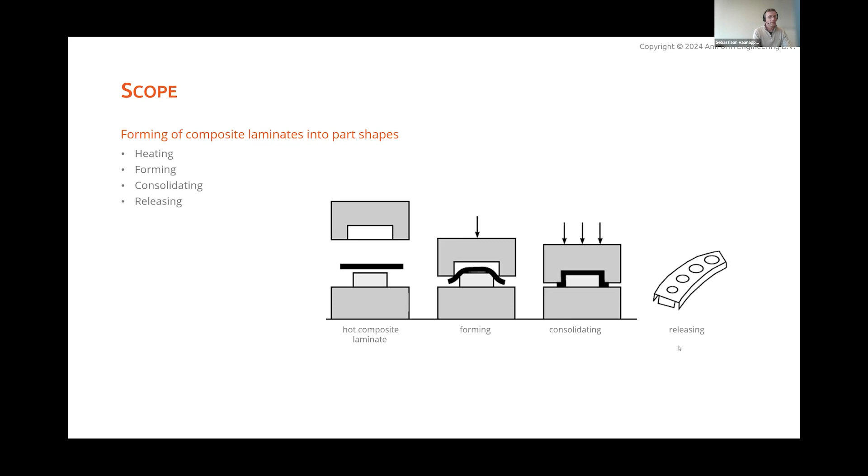Usually we consider a laminate, which is heated, then we form it, we consolidate it, and then we release the part and we have a nice part. Well, not always that nice. During the forming, there can be some defect development, like wrinkles, some poor consolidation spots, ply splitting, all kind of defects that can knock down your structural performance of the part in the end.

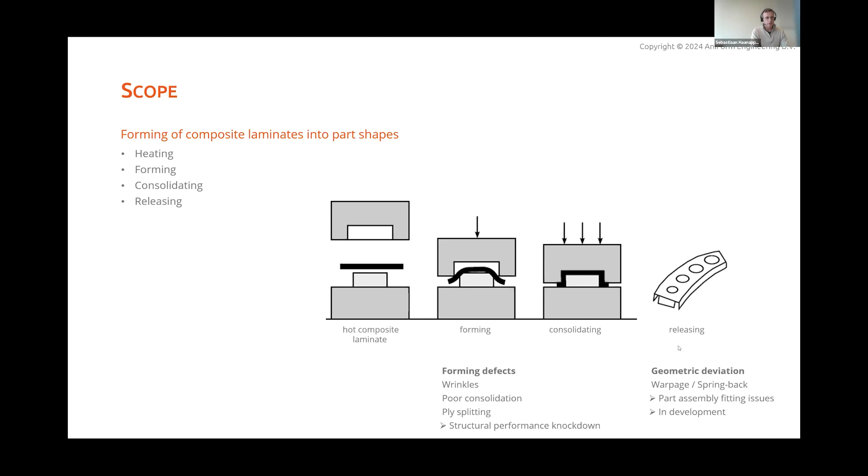Also, in the release stage, there's usually some geometric deviation occurring, also known as warpage or spring back, which gives some problems when doing part assembly in larger structures. It gives us fitting issues. We work on that kind of simulations as well. It's in development. That's not part of the talk today. Today's focus is on forming defects. And yes, it may be clear that there are quite some manufacturing challenges.

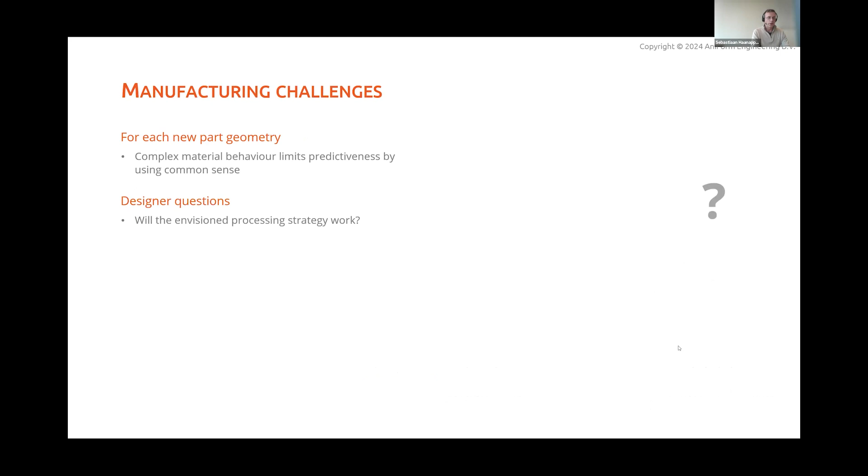So what about these? Well, what we see is really for each new part geometry, the complex material behavior of these composites in their molten stage really limits predictiveness by using common sense. And we see a lot of designer questions like, I have a process strategy in mind, but will it actually work? Will I have wrinkling or fiber waviness, and where does it occur? What about this poor consolidation? Caused a lot by fiber bridging, when fibers span corners, for example. What about my temperature? What about cold spots and crystallization?

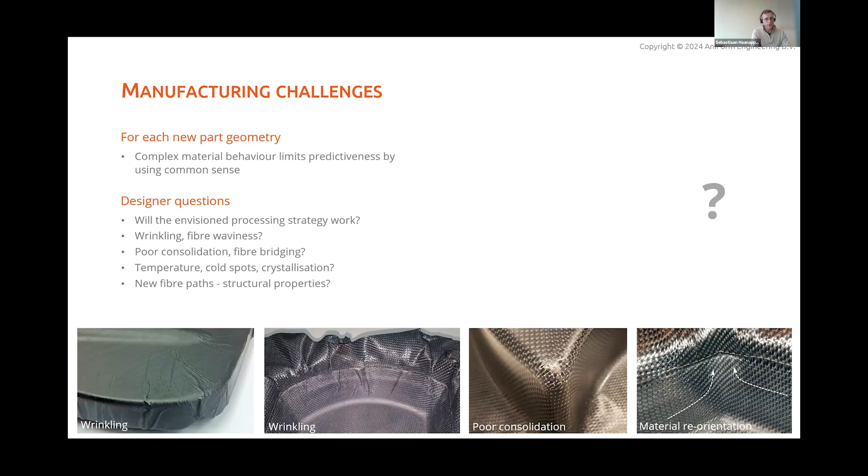When I form a part, I get new fiber directions. We get material reorientation. What will it do with the structural properties? A lot of questions. And in the traditional approach, we usually go through many design iterations to answer these questions. So usually we have a part design. You think of a process design to make it. You take the part in production, and usually we have some issues. So you can go back to the drawing table and rethink the part design and the process design. And usually you go through this cycle quite a lot of times, and we call that trial and error.

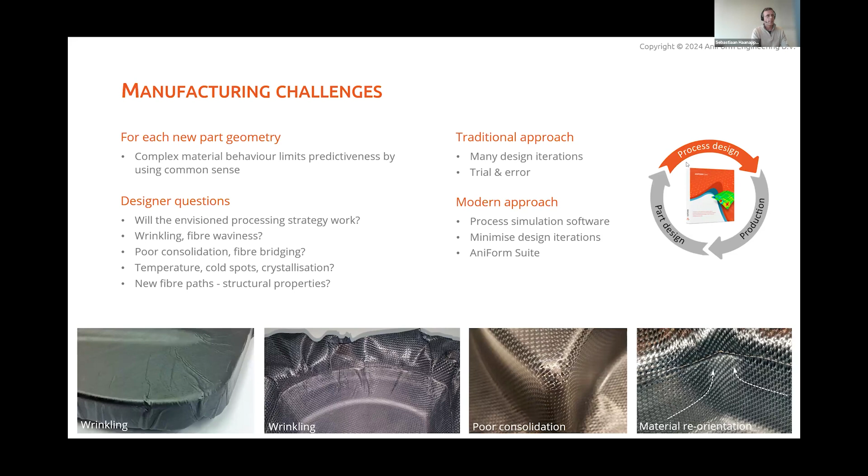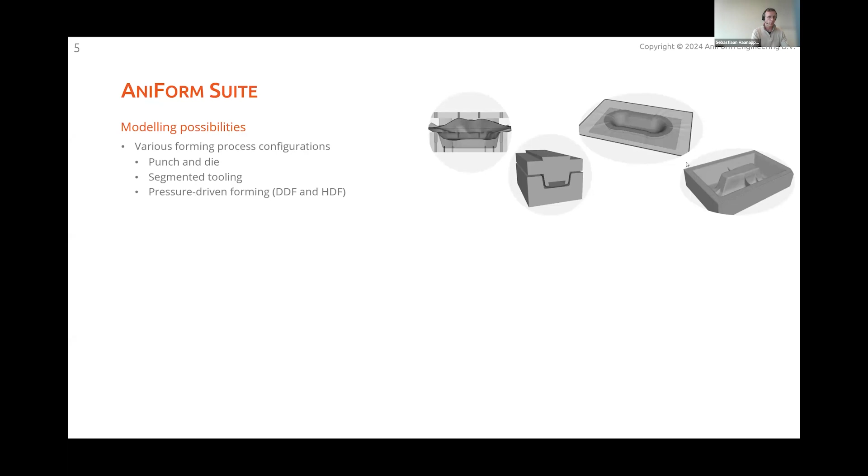And the slightly modern approach would be to use a process simulation software to minimize this number of design iterations. And that's why we thought, let's support that and let's develop a software, which we nowadays call AniForm Suite. So that's a software package, and it has all kind of modeling possibilities. I quickly go through it. You can model various forming process configurations, just the classical one, a punch and a die, and form it. But you can split up the tool as well and go for segmented tooling and see what happens with the forming of your laminate. There are also other variants like pressure-driven forming processes where we talk about double diaphragm forming or hot drape forming.

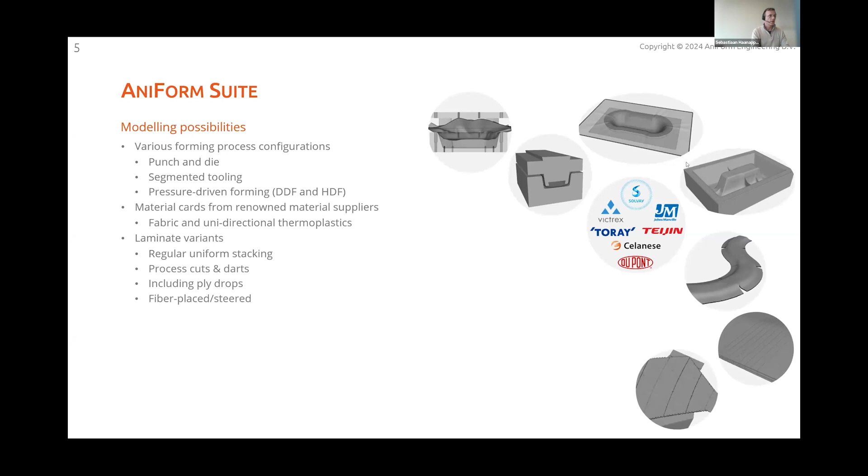You can model a material by using a material card. We have them from renowned material suppliers like Solvay, Victrex, Toray, Teijin, Johns Manville, Celanese, and DuPont, representing a fabric or a unidirectional thermoplastic composite. You can play with laminate variants. So a regular laminate consists of a uniform stacking of plies, where you can process in the blank, for example, cuts and darts. But you can also include ply drops and model tailor blanks in this way. You can also model fiber steered or fiber placed blanks.

And then you can play around with how you handle the laminate, because there are quite some methods and you can study them in the software. So you can, for example, use grippers and springs and connect them to the laminate and see what happens. You can also use another kind of support like pin supports.

Well, that's all nice. And you can create your model and then do a simulation, and a simulation is then solved by our autonomous implicit solver, a finite element solver. And that gives us quite accurate results today. And that is amongst others possible because we model the relevant deformation mechanisms that develop during forming a laminate.

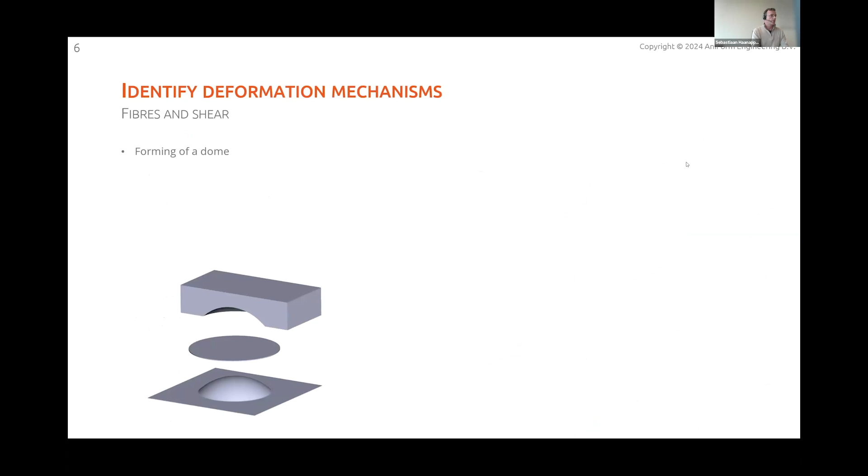What about these deformation mechanisms? Let me explain a bit what we take into account here. So let's identify these deformation mechanisms. And I would like to use this example for that, the forming of a dome, a circular blank, a punch, and a die on top. And we form a cross-plied unidirectional laminate like this. And if you form it, it typically looks like this.

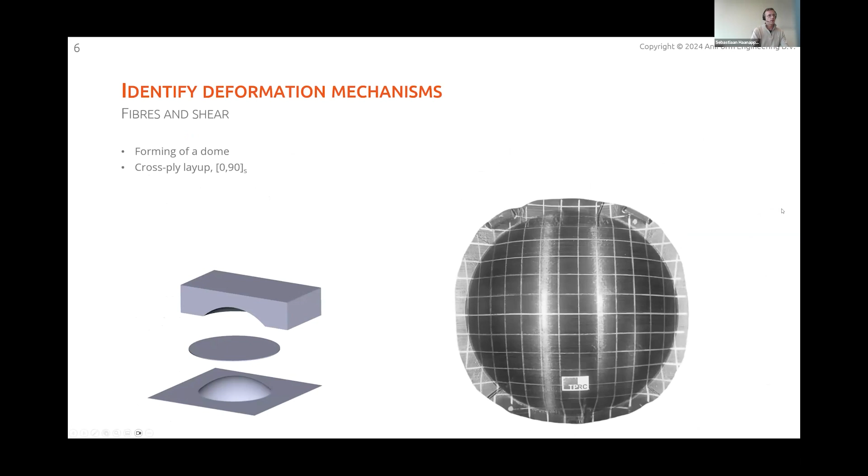And if we take a closer look, you can draw lines here in the 0 and 90 direction, and we see that the material gets pulled inwards. That is because there's no stretch in the fiber direction in those directions. We also see at those locations no in-plane deformations in those indicated spots.

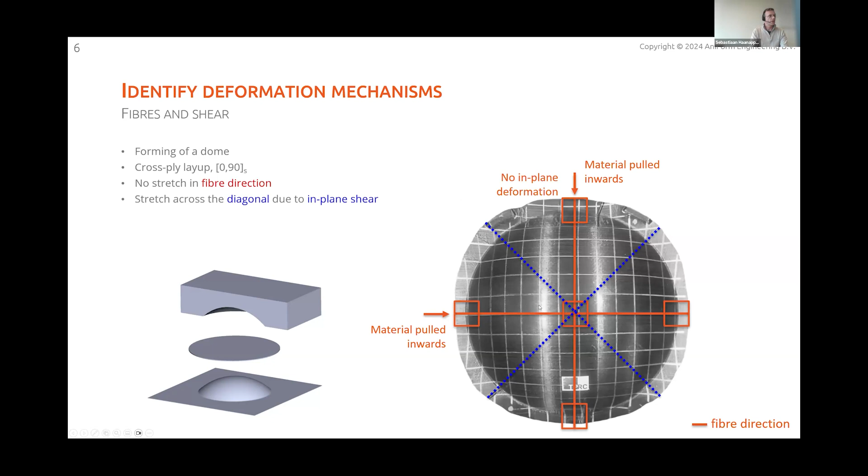On the other hand, if we draw diagonal lines here, we see some extension or stretch, and that is due to some in-plane shear that is developing here. You can clearly see in the corners that these squares are actually not square anymore.

So what we see here is that there's some fiber inextensibility, which we need to describe, and there's in-plane shear going on, governing this forming process of this dome. So these mechanisms for sure need to be considered in the model.

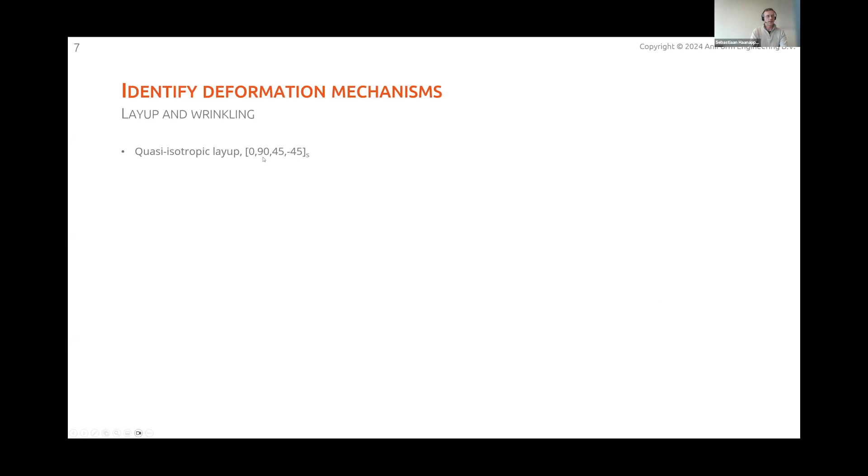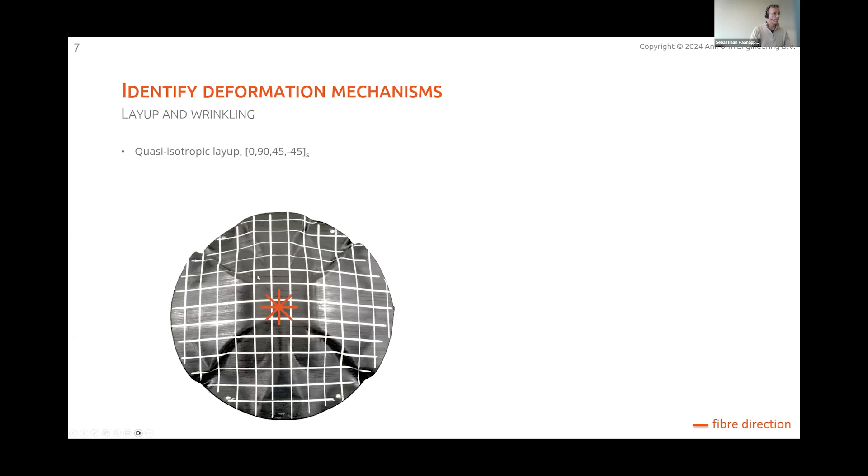Going a step further, this was a cross-ply laminate. Now let's focus on the forming of a quasi-isotropic laminate. That means there's 0, 90, 45, and minus 45 fiber directions in there. And if we form that dome, we get a different result. We see quite some buckling going on. These are, by the way, the fiber directions in that laminate. We see quite some local bending and buckling going on.

And if we completely close the press, these buckled areas are pressed into large wrinkles. So there's quite some out-of-plane mechanisms going on, and that means we need to really describe this out-of-plane bending behavior. We need to describe the out-of-plane bending rigidity in the model.

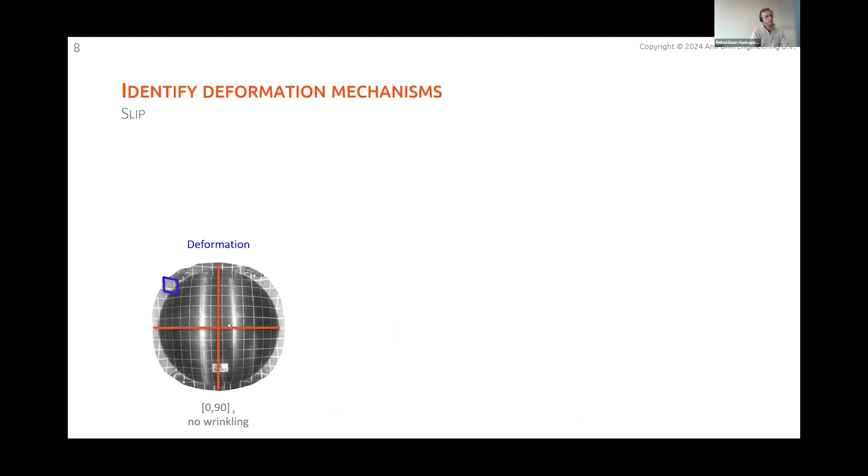The last deformation mechanism is about slip. So you may remember the first result with the cross-ply layup we had. It looked like this, a nice dome without so much wrinkling. And we saw a lot of deformation at specific spots, shear deformation.

Suppose we have the same cross-ply laminate, but we rotate it by 45 degrees, then we get a rotated deformation field, where at this point we now have no deformation, whereas we had deformation in the original rotation. So for a quasi-isotropic layup, actually both situations are present, but then superimposed. And that gave us this result, a lot of big wrinkles.

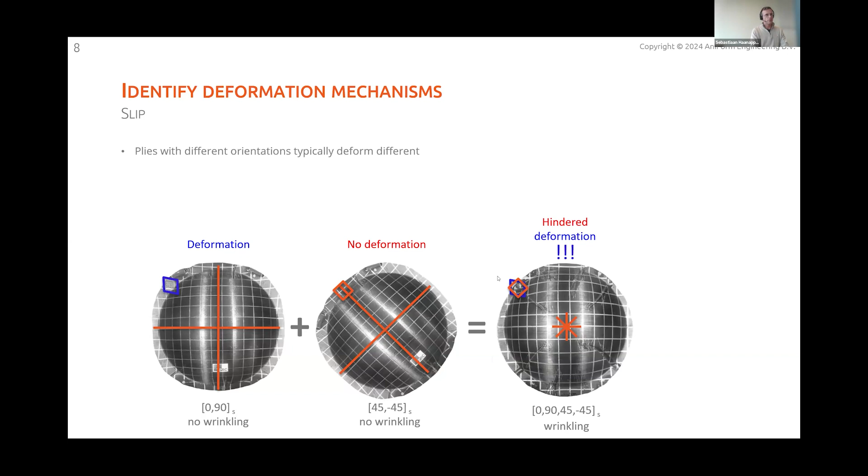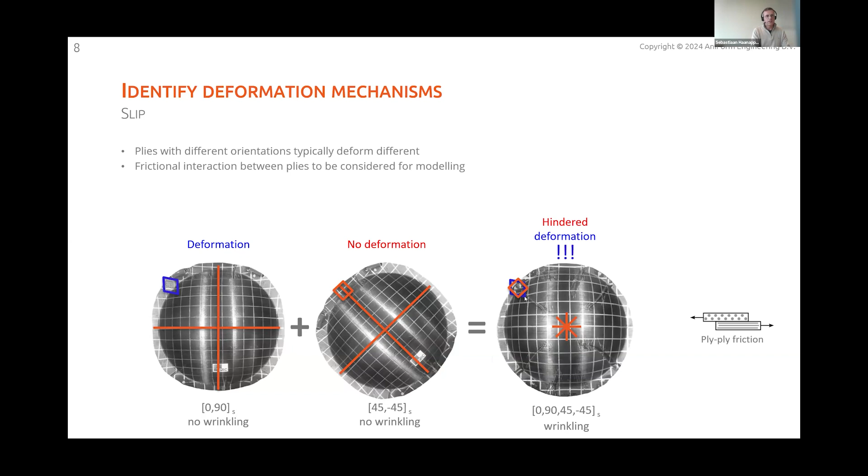So what can we say about this? Well, plies with different orientations typically deform differently. They have, in this case, a rotated deformation pattern. But it means at certain spots the deformation is hindered due to frictional interaction between the plies that is occurring there. And therefore, we can say that we need to model the friction between the plies.

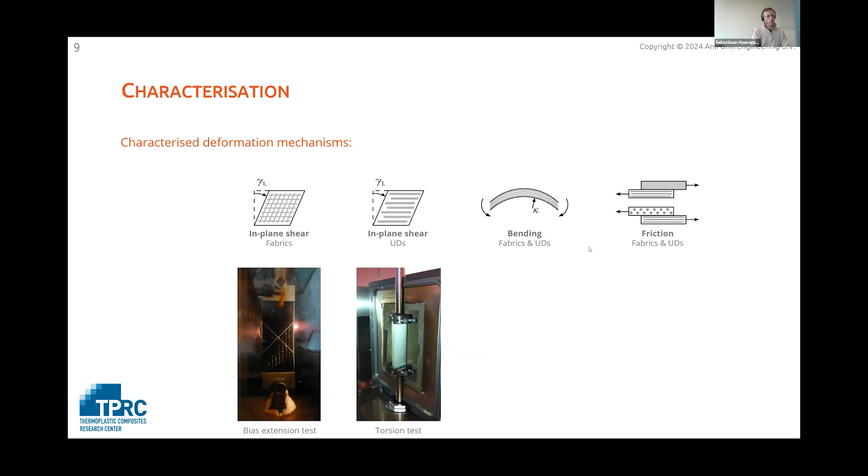Okay. So the characterized deformation mechanisms are in-plane shear for fabrics and unidirectionals. We characterize bending for fabrics and UDs, and we characterize friction for fabrics and UDs. And we use the bias extension test for characterizing shear of fabrics. We use the torsion bar test for characterizing shear of unidirectionals.

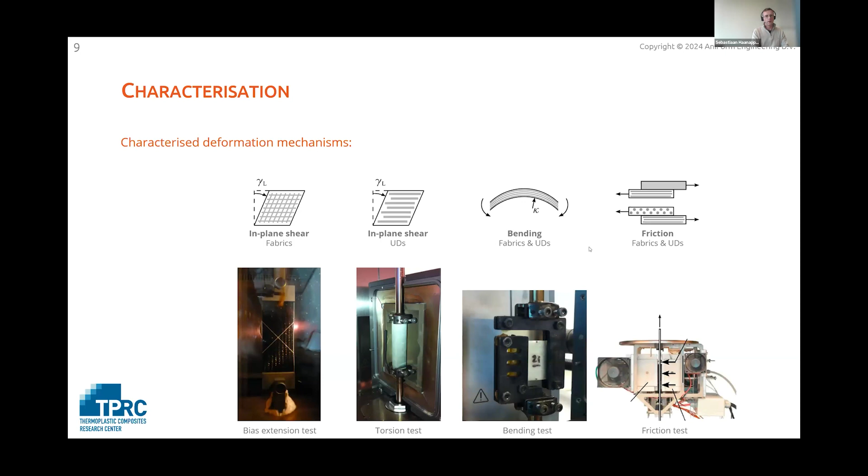We characterize the bending behavior using a bending test in a rheometer, and we characterize the slip using a friction tester. And that is a program today offered by the TPRC. So we have that characterization generally available in those results.

Let's go back to the simulation. We want to create a model, and the domain we simulate is represented by finite elements like displayed here, all these triangles. Then in this model we describe the observed and characterized mechanisms. And these are described by calibrated constitutive models serving as an input for these finite elements.

And we use different finite element types for the different deformation mechanisms. So we use membrane elements to describe fiber tension and in-plane shear. We use discrete Kirchhoff triangles to describe the out-of-plane bending of plies, and we use contact elements to describe ply-ply friction, but also tool-ply friction naturally.

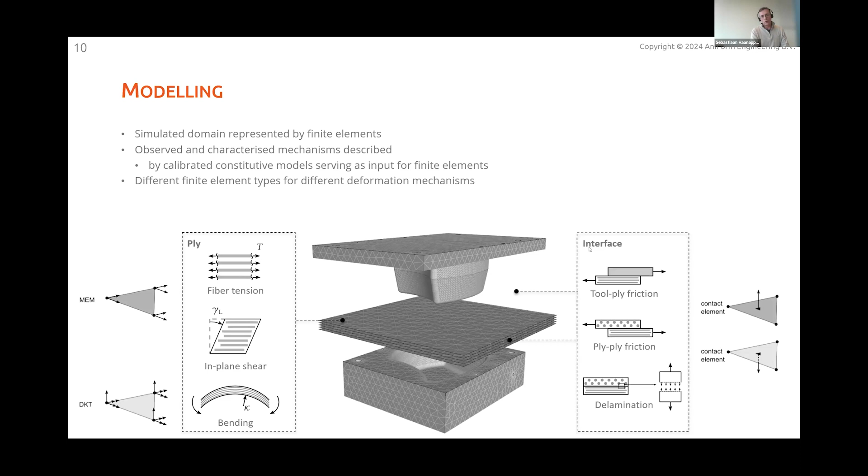And yeah, let's see what we can do with such a model. And therefore, I have a little case study. It's a demo part. It is relatively deep. It has concave and convex flanges. We manufacture it using a woven fabric 5 harness carbon fiber PPS matrix material. It's also known as the Toray Cetex TC1100.

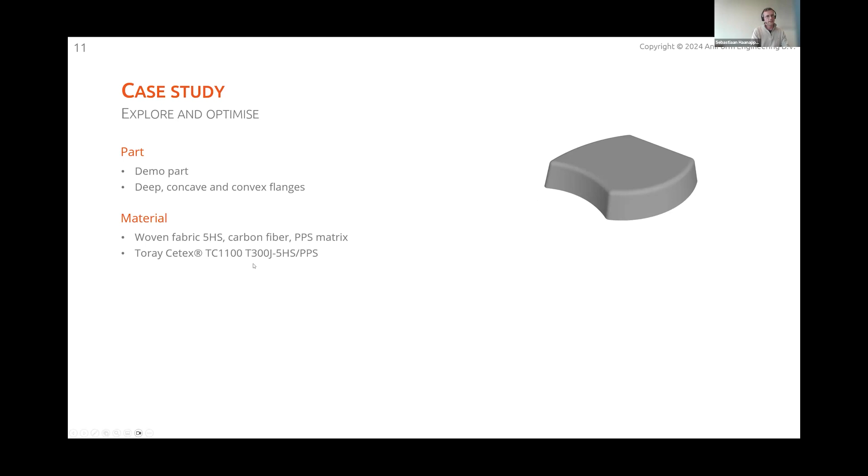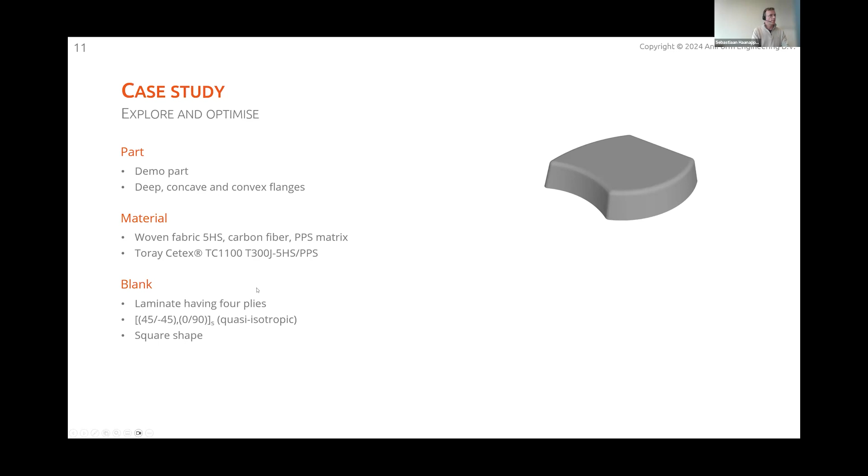We consider a blank. It's a laminate having 4 plies, initially stacked in a quasi-isotropic manner, so 45s on the outside, and in the center we have a 0/90 ply or 2 0/90 plies, and we consider a square shape of the blank. And you can model that then in AniForm pre-post and do a prediction.

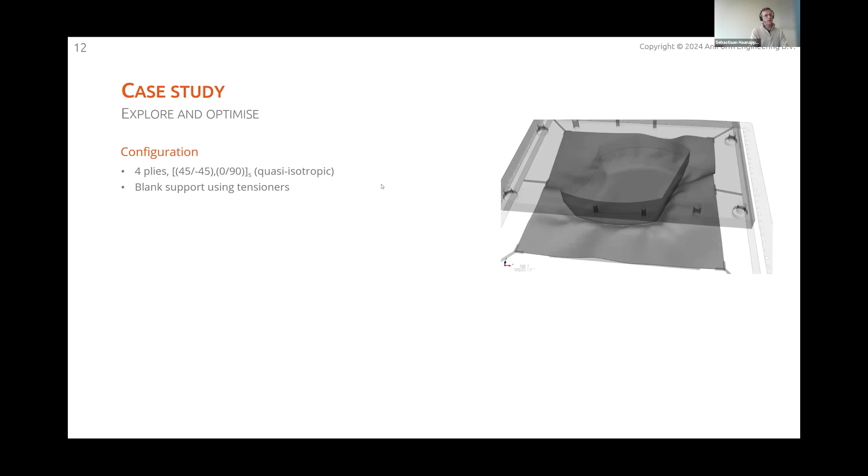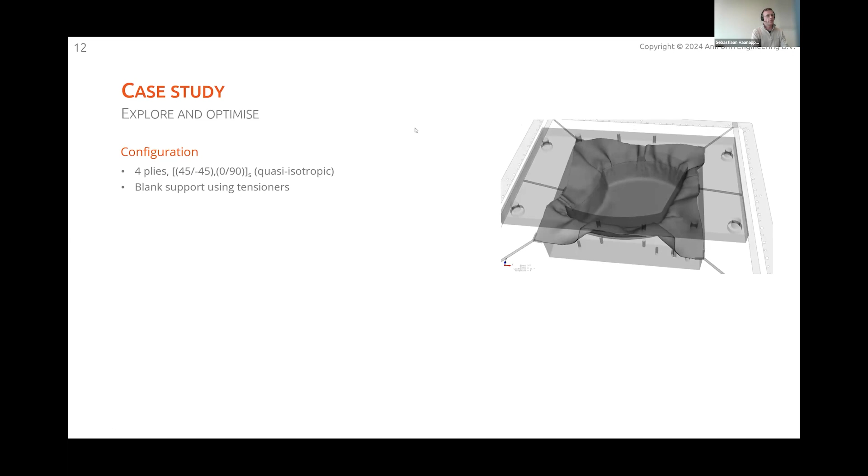So about this simulation result with a quasi-isotropic layup, we have the blank, by the way, supported using tensioners, and then you typically get the result like you see here in the video. So a lot of things going on. Let's play it one more time. Here you see the shaping of the laminate into that part. And here we see the forming progression snapshots. And what we see is severe wrinkling. And we see it in reality too.

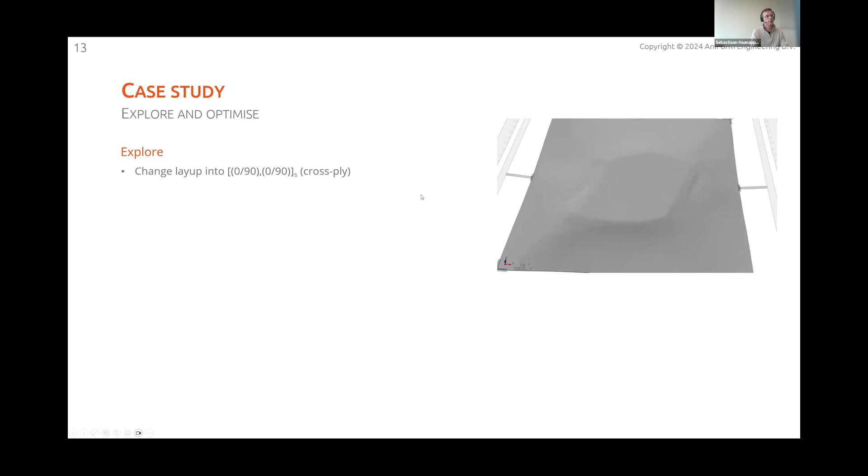But what can we do about it? Well, we have a simulation to explore things. So we can change the layup, for example, make the laminate a cross ply. So just changing the numbers and do a new prediction. And then the prediction looks like this. Quite different. One more time. So here are the snapshots of the forming of the laminate.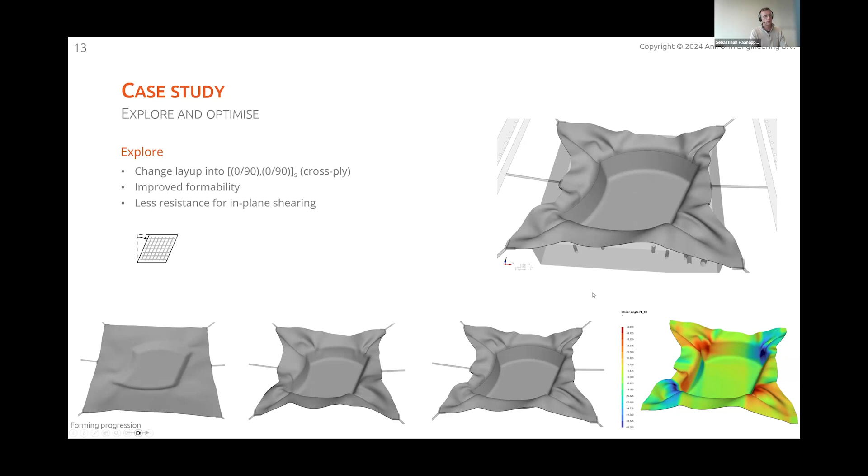And we can conclude when we compare this cross-ply layup with a quasi-isotropic layup that there's quite some improved formability. And that is mostly because there's less resistance against in-plane shearing. We don't need all that friction between a 0/90 and a 45 ply in this case because of the absence of it. And this shear is plotted in this image as well. We see a lot of in-plane shear in the corners. And that's what you really need to have good formability when forming this kind of deep part.

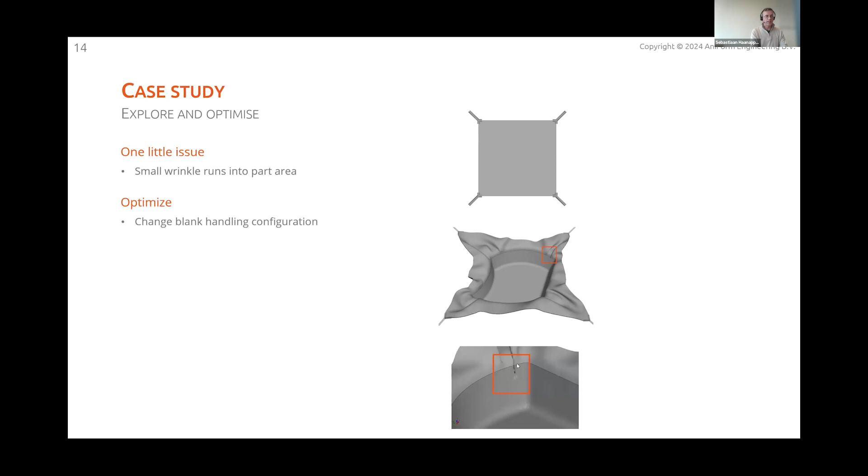There's one little issue. So this is the situation. Laminate tensions like this, and then this is the resulting deformation. There's a little wrinkle that runs into the part area over there. We can zoom in. And well, what can we do about that? Again, we have a simulation tool, so we can do anything we want. So one thing was just to change the blank handling configuration. And by that, I mean to change the orientation and position of the springs attached to the laminate. So instead of 4 springs pulling diagonally on the laminate, we now put 2 springs per corner and pull perpendicular or in line with the fiber direction.

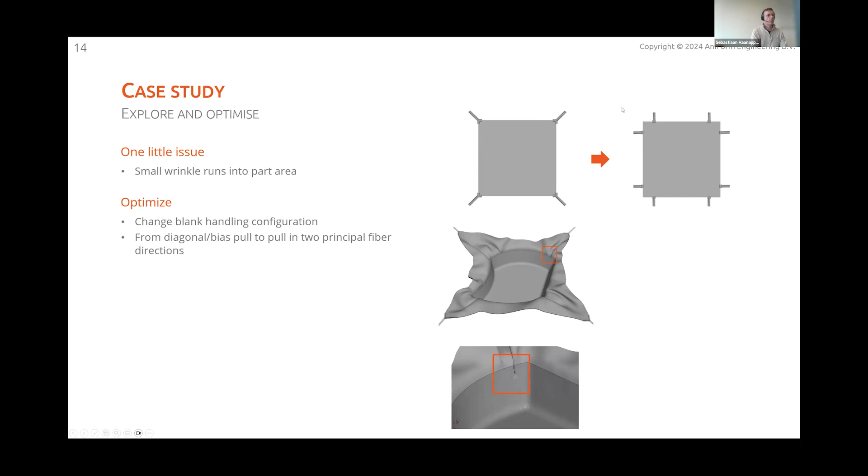And then if you do a prediction, you minimize this wrinkle. It gets just arrested before it runs into the actual part area indicated by this black line. This is the part edge. So the wrinkle gets arrested. That's how we call that. So that's quite a nice optimization effort, I think. Of course, we can do some verifications. We're a member of the TPRC, so we have access to the press over there.

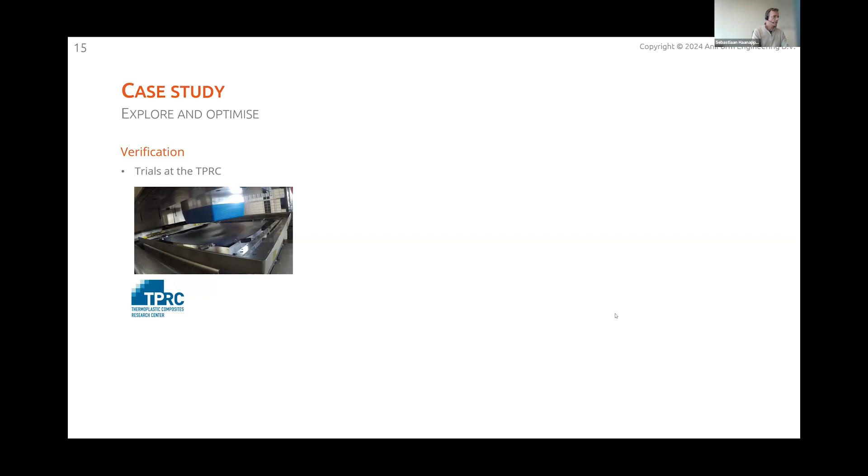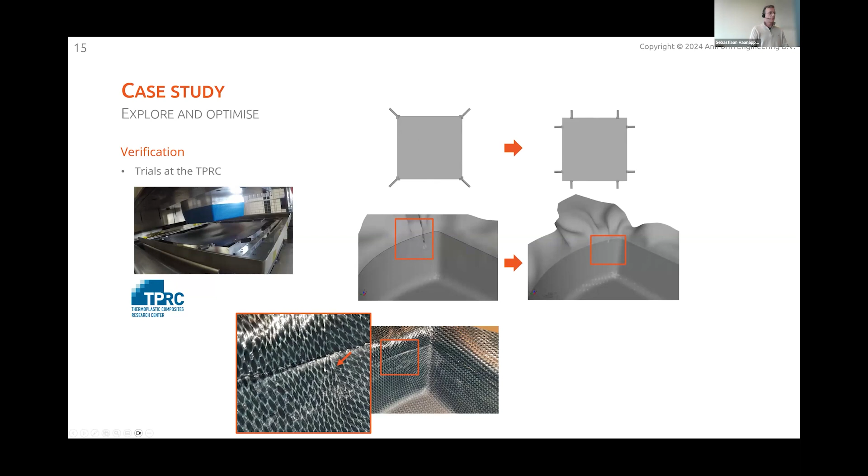So we did a lot of trials in the past, and well, this was the situation, if you remember. So tensioning like this and tensioning like this. And we did that in practice as well. And if we zoom in on the part, if you look carefully, you see that the fiber directions here take quite a different direction. The wrinkle is not that obvious, but from this discontinuity here, you can actually conclude there was a big wrinkle in there, but now masked away a bit by the huge pressure that was exerted on this part.

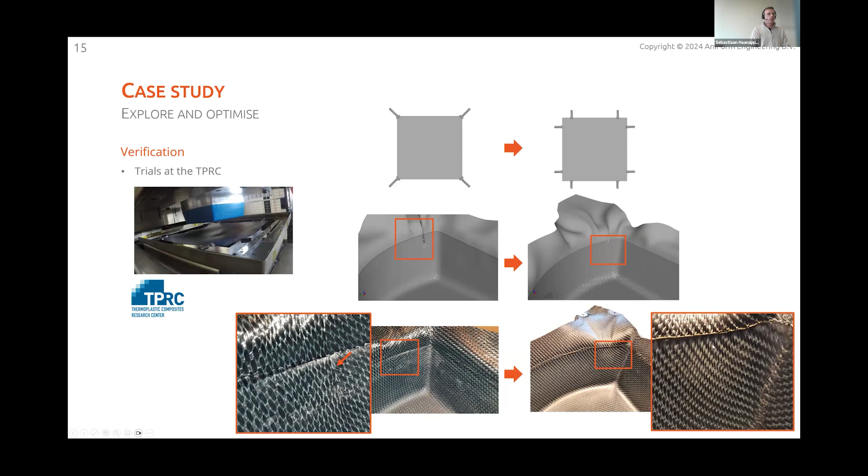And similarly, we tested this configuration, and you see not the presence of such a wrinkle, and you see nicely uniform shearing of the material in that corner. Yeah, that's all nice.

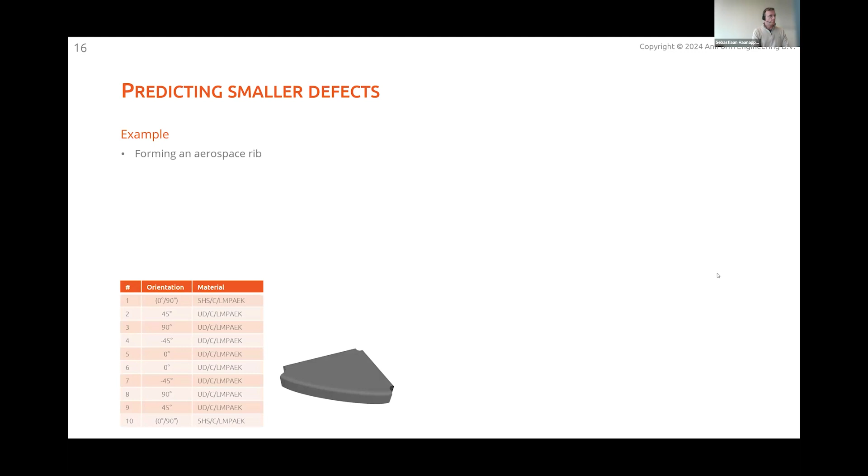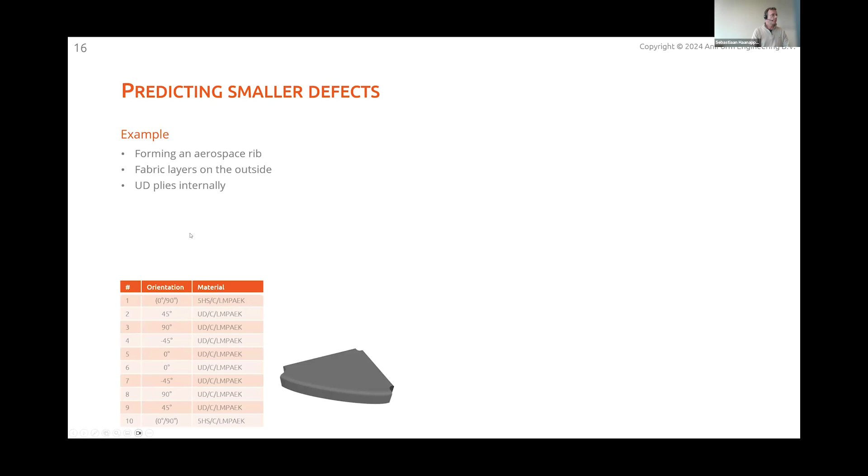But what about predicting the smaller defects, smaller wrinkles? For that, I would like to talk about this example where we form an aerospace rib. With this layup, quite a special layup. We have fabric layers on the outside for this case, 5 harness carbon fabric with a low melting PAEK resin, and then unidirectional plies on the inside. This is how the forming configuration looks like. Blank shape was already optimized, and it is now connected to springs or tensioners.

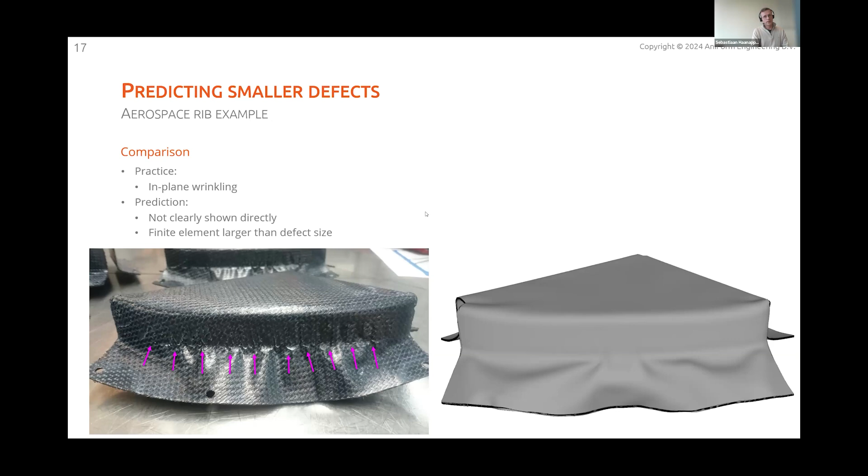And then we can do a prediction, and it looks roughly like this - not so much going on. When we compare with a real part in practice, we can see there was actually quite some in-plane wrinkling going on, especially in this curved flange. But if you look in the simulation, that's not so obvious at first glance. These smaller defects we see in practice aren't clearly visible, partly because the finite elements are larger than the defect size, so things become more complicated when it comes to result interpretation.

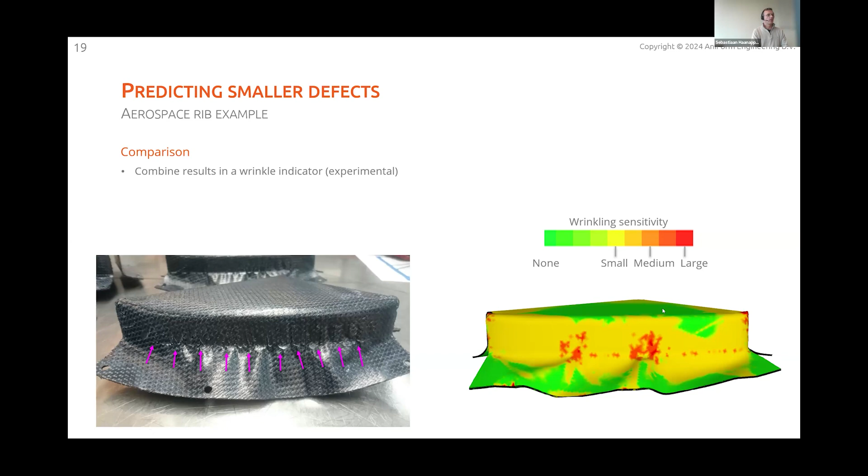That's quite indirect though. You can make the analysis task easier by using a wrinkle indicator. That's experimental, but it gives you some kind of wrinkling sensitivity. Under the hood it looks at the results I just showed you, so you get a big yellow area where the wrinkle sensitivity is between small and medium, and red spots say there's quite a big chance you'll have a wrinkle there. So I'd say the issued area is quite well indicated. However, if you don't have the real parts, it's quite hard to be very conclusive about this kind of defect development at this scale.

We also see that the industry demands more precise and definitive defect detection. But to start doing that, we also need to dedicate research to refinements in material characterization techniques and material models.

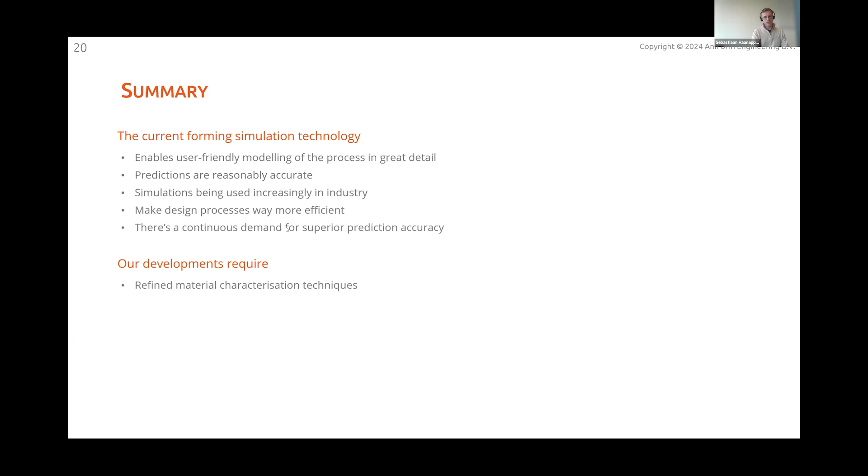To summarize, the current forming simulation technology, the state of the art, enables quite user-friendly modeling of the process in great detail. The predictions are reasonably accurate, and simulations are being used increasingly in industry over the last 10 years - we already see that a lot. It makes the design process way more efficient already. But there's a continuous demand for superior prediction accuracy, and therefore our developments require refined material characterization techniques and refined material models as well. Such core R&D things are also facilitated by TPRC's research projects.

So that brings me to the next speaker, Sebastiaan Wijskamp from the TPRC, who will do a deep dive into this R&D related work. Sebastiaan, may I give the ball to you?

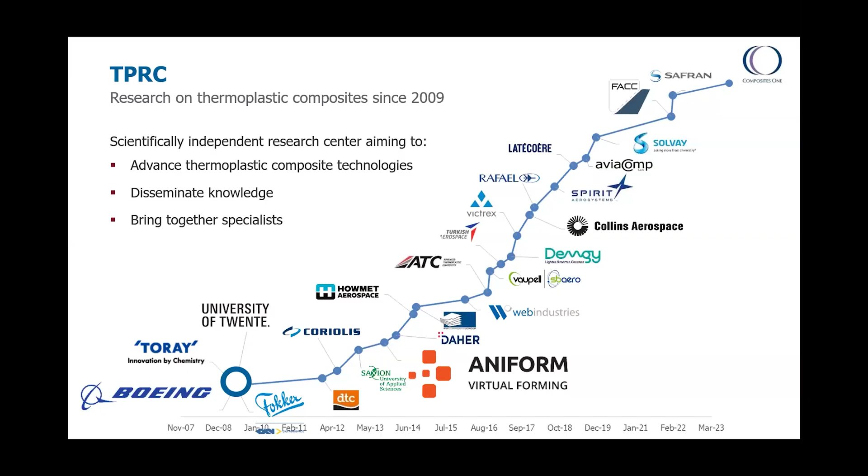Okay, thank you David, thank you Sebastiaan. So just a few words on the TPRC: we are a scientifically independent research center created in 2009, so this year we celebrate our 15th anniversary. We were created to advance thermoplastic composite technologies. What we learn, we try to publish as much as possible, and the majority of our work is done by PhD students, so most of it ends up in journal articles and PhD theses - dissemination is a big part of our work. We also serve as a networking community; specialists come together twice per year in Enschede to discuss our roadmap research.

You see our partners here, mainly aerospace oriented, and I've highlighted AniForm, who has been a partner with us for over 10 years already, collaborating on many projects. I'm going to talk about our latest developments in material characterization for forming simulations, just showing a little piece of the iceberg. As Sebastiaan mentioned, wrinkles are a major challenge in stamp forming, especially with unidirectional tapes.

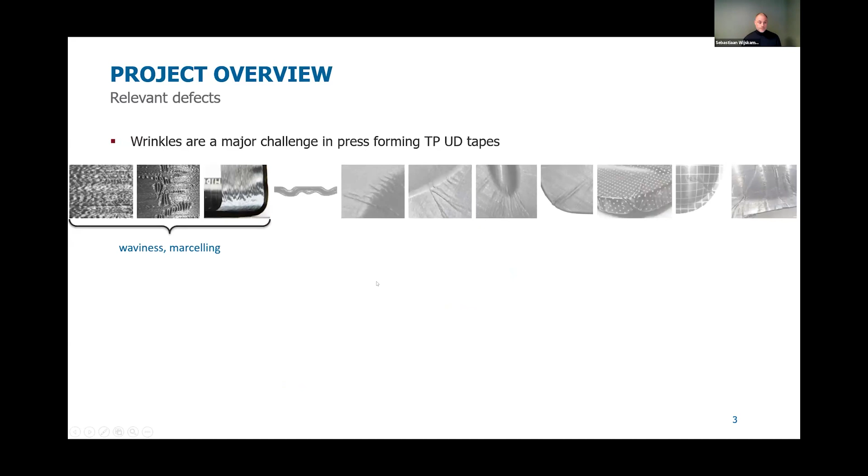There's small wrinkles, waviness, and marcelling, and there are some indicators that will point them, if you know as a user how to interpret these results.

The large wrinkles or folds, larger than the element size, are quite obvious in the AniForm software. We really would like to understand and model these small wrinkles, both in and out of the plane.

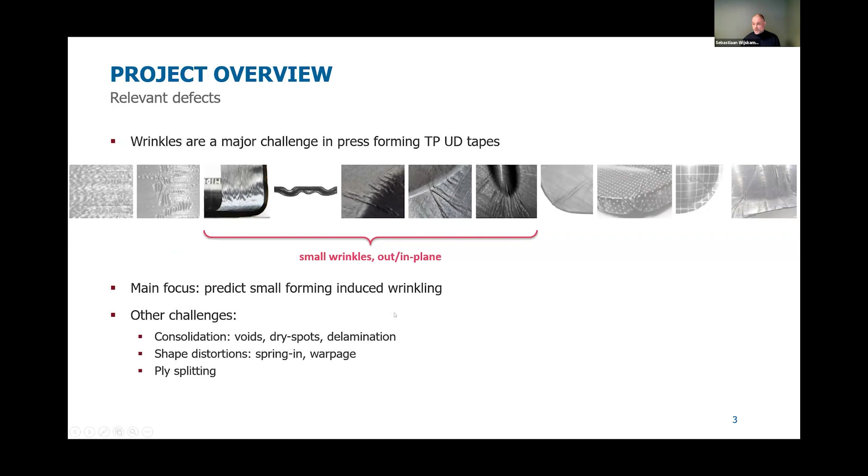There's also other challenges: fiber matrix redistribution, voids, dry spots, maybe delamination, shape distortion, spring-in and warpage, and ply splitting. We will not discuss these today.

Today it's more about our characterization work. So we have our materials, which can be unidirectionals or fabrics. We're currently also looking into other types of materials, so discontinuous fiber reinforced laminates, for example.

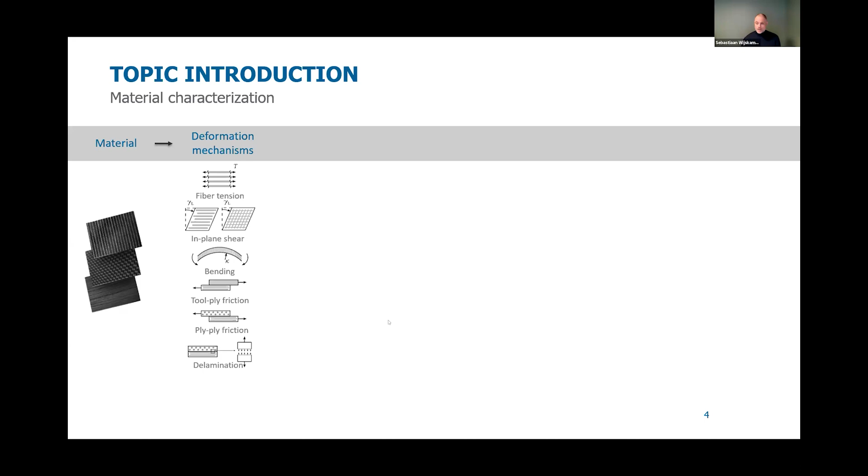Sebastiaan highlighted already the deformation mechanisms that we have isolated, the characterization measurements, and the subsequent material modeling, which is then used in our finite element simulations.

Today, I'm going to look into in-plane shear characterization and ply-ply friction characterization and modeling, and also a new ply-ply friction apparatus that we have developed in the last 2 years.

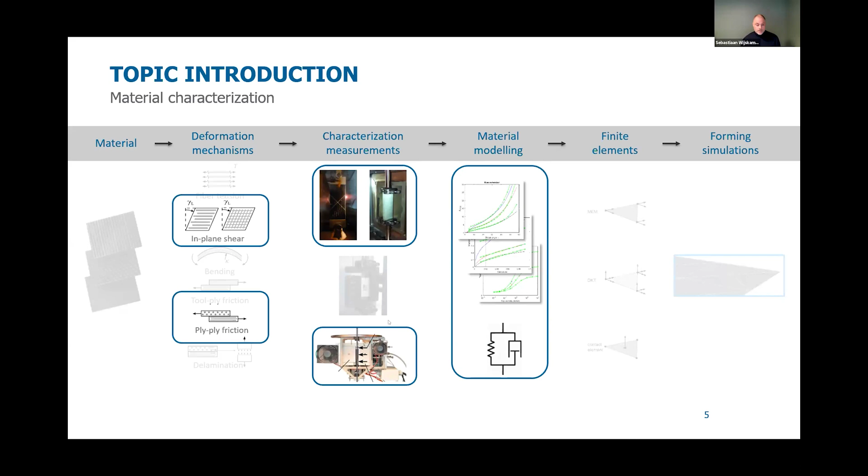So let's have a look at ply-ply friction. It's the resistance between stacked plies against movement.

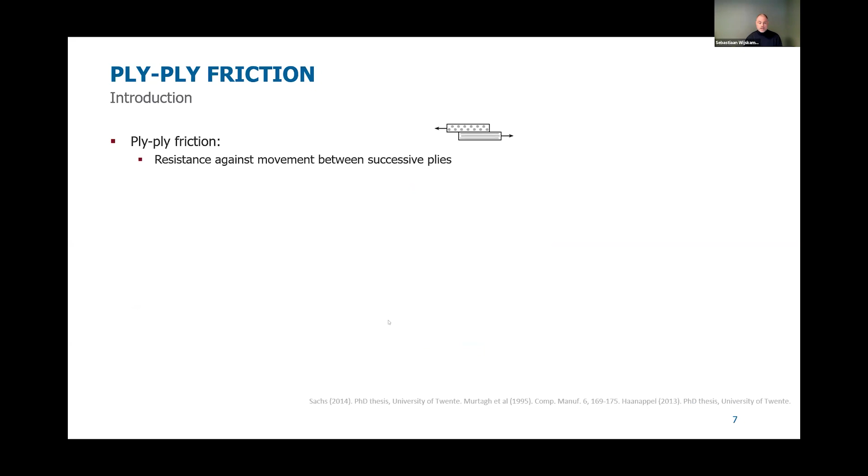We need it because without slippage... less friction is better, because then layers can move with respect to each other. It will allow us to form V-shapes, for example in the top picture, and also laminates with different orientations to move with respect to each other.

In the past, we have developed a friction tester where we really try to manage the pressure distribution and temperature profile, and measure the forces required to pull one layer out from between two other layers, or between metal substrates. So we can also measure the tool-ply friction with this device.

Well, if you look at the bottom of this slide, you see a small reference, and in the reference we also see Haanappel, and Sebastiaan was in fact the first PhD student to graduate with the TPRC.

Typical friction response is that the shear stress grows, reaches a peak, and then drops down to a certain plateau value. So we recognize a peak and a long-time shear stress.

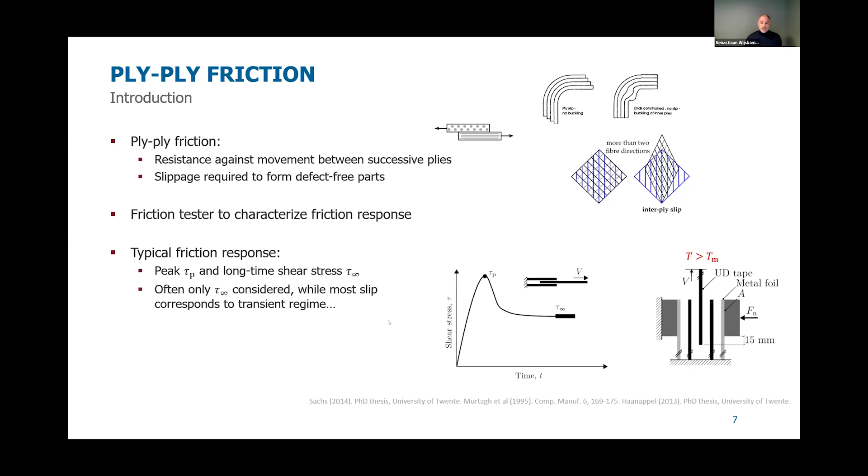In the material models, we often use the long-term shear stress. It's more easy to model. Or we pick the peak stress. So AniForm offers both options. Most of the time, the long shear stress is considered here.

Let's have a look at this single ply pull-out test, where we vary the rate or speed with which we pull the layer from between the others. In our curve, we see that with increasing speed, the peak grows and we reach a certain plateau of the long-term shear stress.

The gray line here depicts the average with error bars of the same measurement conditions on various samples. So you see that the deviation is smaller than the difference between the averages. So that's good.

And if you take all the peaks and all the long shear stress values, and plot them on a log-log scale, you can create a so-called flow curve.

One of our researchers, Pierik, has been able to model this flow curve, both for the peaks and for the long-term shear stress. Here you see that until a certain point, the peak and the long-term shear stress coincide - that means there is no peak.

We see that, for example, at the lower rate here. At a certain point, the long-term shear stress does not grow with the rate, and it reaches some kind of plateau.

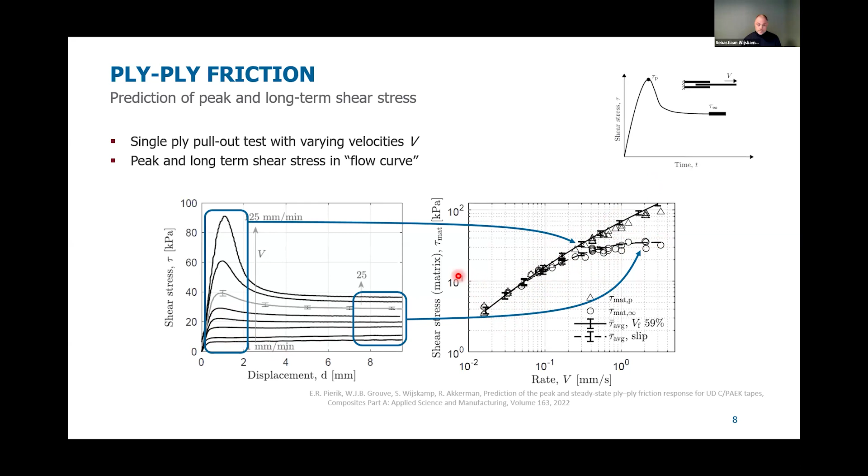It's non-linear viscous, so that means that we need a viscosity, which we can measure using rheometers. We also need a description of the interface, the interlayer between two plies.

So we have a description of this interlayer, and we have our viscosity, so we are able to describe the stress growth and the stress. We can describe the peak of the shear stress.

Here, after the stress peak, there's a decrease to this long-term shear stress. But that can only happen when there is slip happening at the walls. So the peak stress is modeled with a no-slip, stick condition.

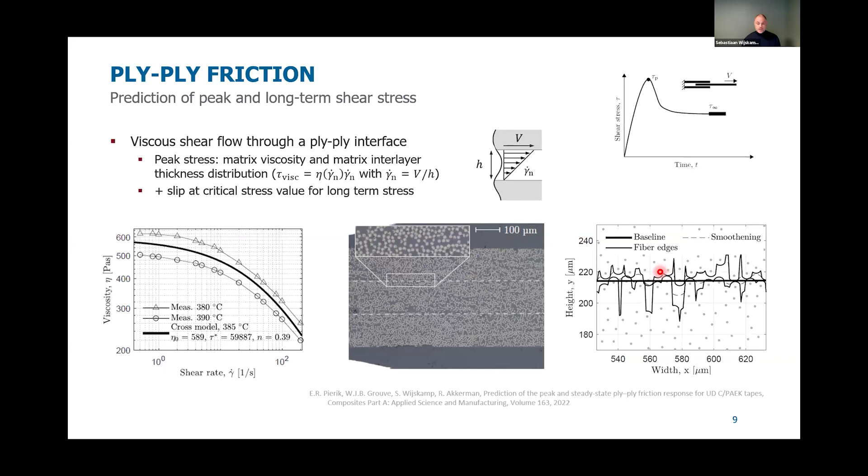We see different heights in our interlayer, so the shortest distance, the shortest height, dominates the occurrence of the shear stress. And when all the points in the cross section have reached the critical shear stress, then there is full slip, and we reach our long-term shear stress plateau.

As we are looking at small wrinkles, that means also small displacements, small slips, so we would also like to be able to describe the full stress-strain or displacement curve. So we need a transient shear flow model.

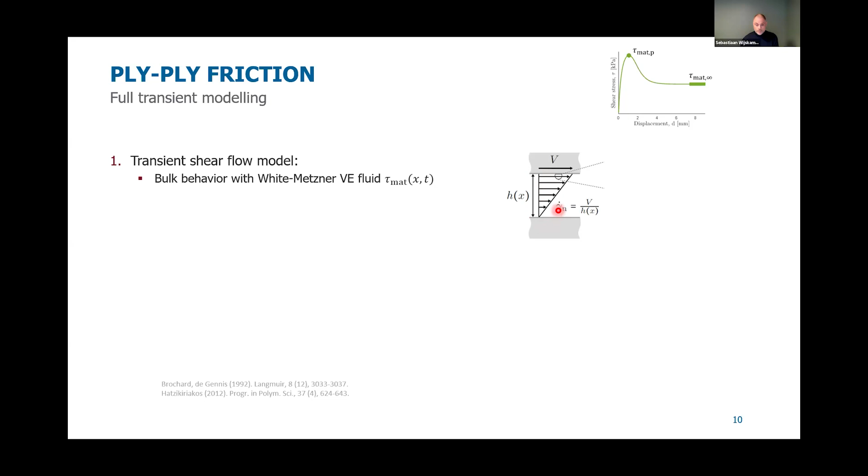Our researcher chose to describe the bulk behavior of the polymer with a White-Metzner viscoelastic fluid and look at slip at the polymer matrix fiber interface. We hypothesized that this is really the mechanism leading to an increasing slip velocity, with which you can describe the decrease of the shear stress starting from the peak stress.

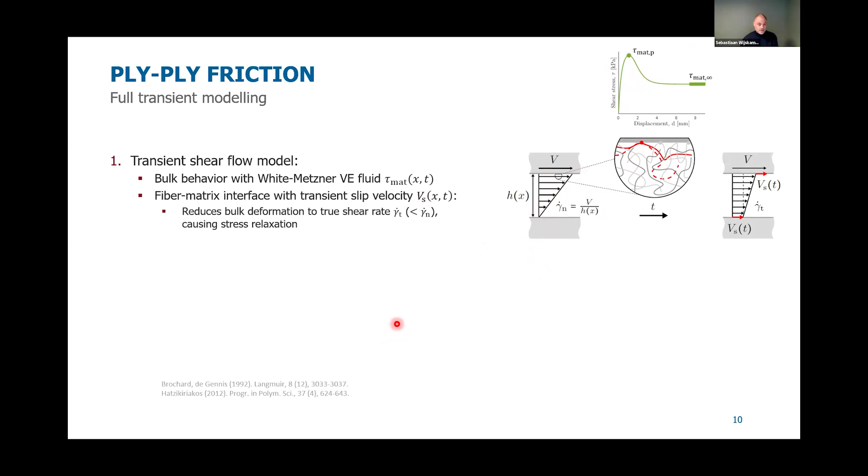Then you get into polymer mechanics. It's about the disentanglement of polymer chains at the wall. You can reach an equilibrium. Disentangled polymers can also go back to the wall, and there can be reorientation and relaxation.

So you can do a state rate analysis, making a model where the polymer state can go back and forth between different states. This ends up in a set of differential equations which you can solve. That goes too far for this presentation, and definitely for my brain, but our researcher was able to solve this problem, and we got a very good description of the stress displacement curve as measured.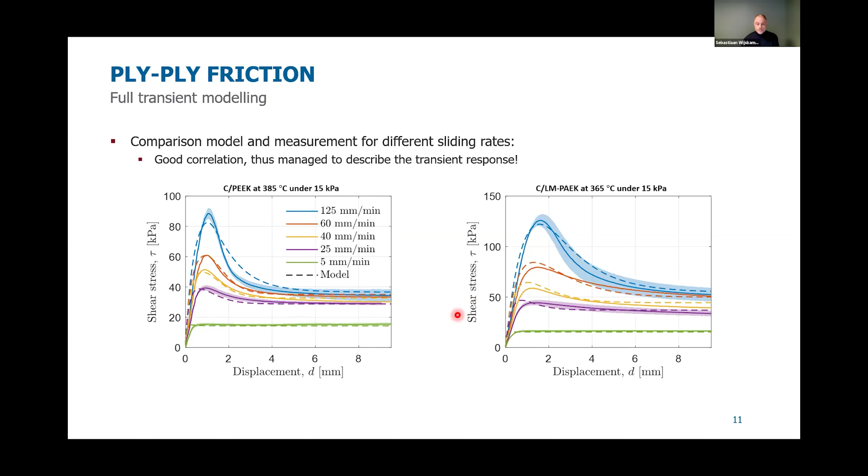So here, one model we could fit to varying rates, describing the full curve for different materials. We took carbon PEEK and carbon low melting PAEK. Very happy with that result.

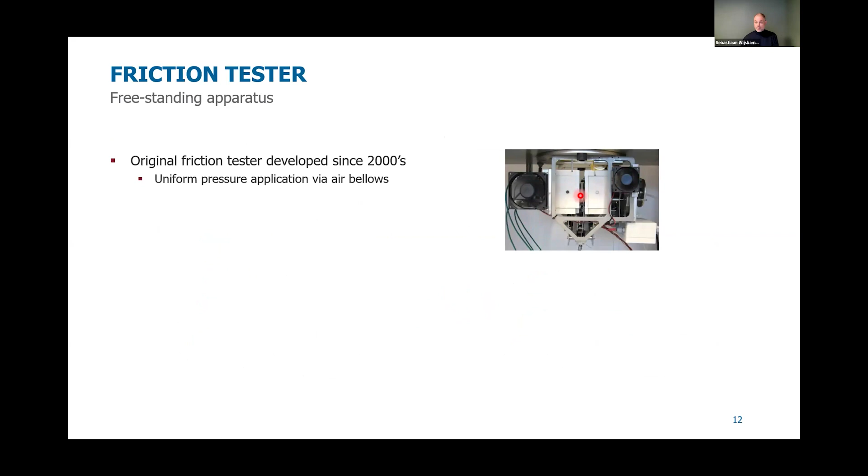Now we talk about friction testing. Here you see the original friction tester. It's in fact two pressure bellows that push heated platens against the ply-ply configuration, and you place this into a tensile tester and then pull the ply from the two plies. It's all displacement controlled with our universal tensile testing machine.

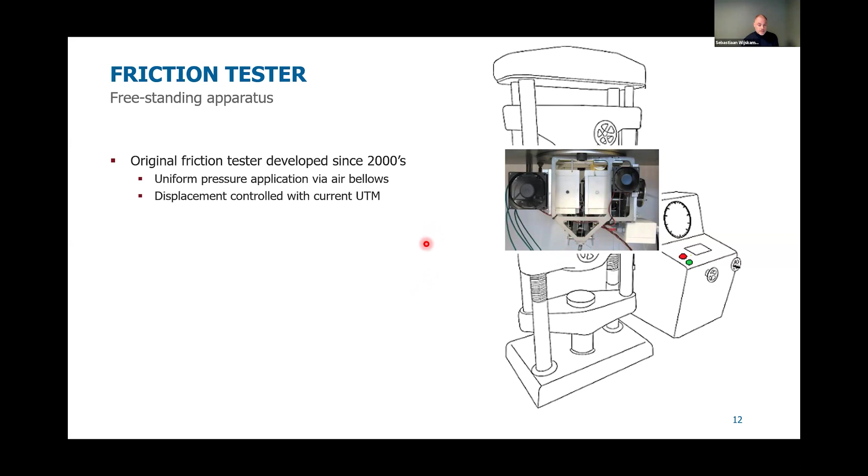It's tedious work, needs some operator skill, and with an outlook on further characterization work and the growing importance of good, robust measurements, we decided to develop a new friction tester. We considered upgrading the previous one so it could be used in a universal tensile testing machine, but in the end we decided to go for a freestanding unit.

So here's a clamping and heating device, and here's a cylinder that can pull the ply from the two plies. The pressure is very well controlled, because if you have any misalignment between your platens, you will generate pressure peaks that mess up your measurement. So a lot of attention has gone into that. It's a very stiff, non-compliant setup — we can pull with kilonewtons without any movement of the machine itself.

We can do this by force and displacement control, which adds more possibilities for research into stress relaxation, for example, and creep type measurements. We can vary the rate, accelerate or do steps, and it's very robust and operator friendly.

We're currently benchmarking this machine against our old friction tester and also against friction testing activities going on at KU Leuven, University of Warwick, Johannes Kepler University in Linz, and Fraunhofer ICT. We've chosen Toray low melting carbon PAEK, and we run a set of experiments at varying speeds, pressure, and temperatures. That was friction testing, describing one of the mechanisms.

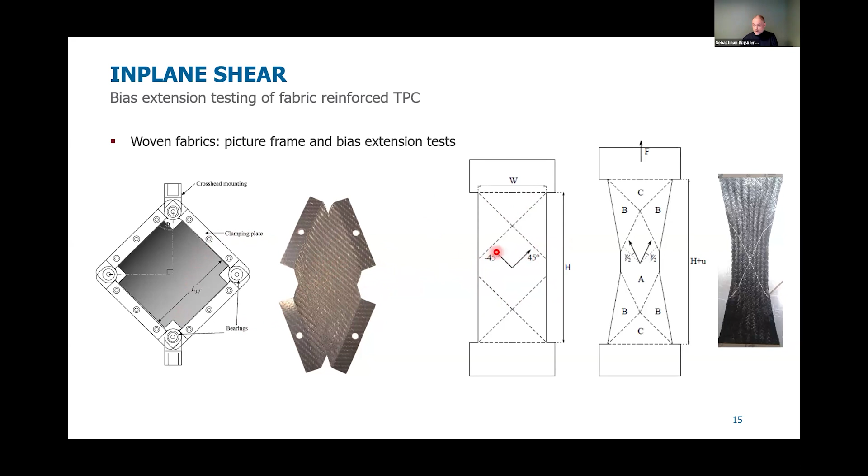The other was in-plane shear. If you look at woven fabrics, quite a lot of people have used the picture frame to generate in-plane shear with a relatively simple analysis, or the bias extension test, which is a lot easier to execute but requires more effort in the analysis.

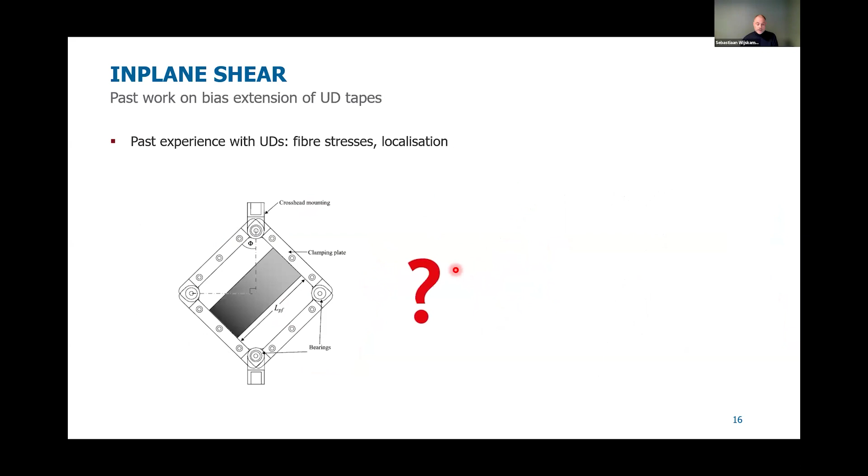We have tried both the picture frame and bias extension test in the past with unidirectional tapes. Would this work? You get enormous localization if you try to test unidirectional materials with a picture frame. If there's a little bit of misalignment, you create enormous fiber stresses, and then delamination, localization, you name it. The same goes for the bias extension test.

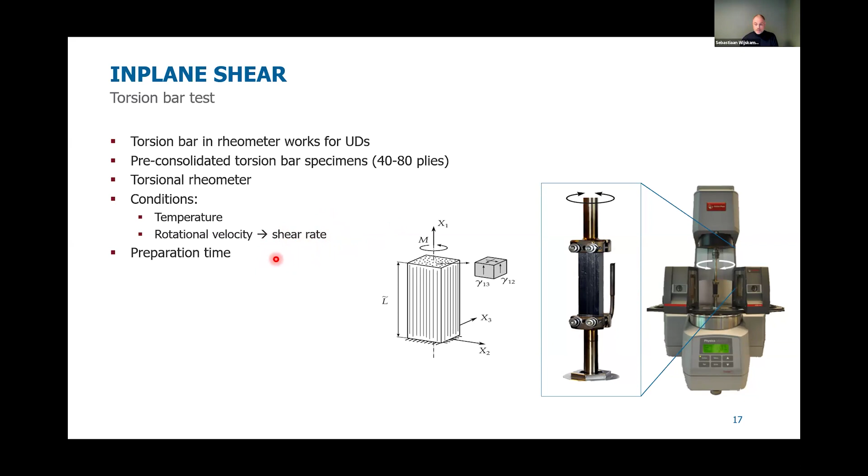So we chose to look at in-plane shear through torsion of a thick beam. We create thick laminates, 10 millimeters or more, cut bars, put them in the rotational rheometer, and can control very well the temperature and angular velocity. With some analysis, you can get in-plane shear behavior from that setup. A big drawback of this test is the preparation time and the amount of material needed.

So Dennis Brands, one of our researchers, thought, I'm going to give it another try with the bias extension test. We also learned that with certain thermal treatment, we were able to limit the deconsolidation or even prevent the deconsolidation of unidirectional laminates. So drying for a bit longer time at higher temperature really helps to get the coherence of the material and no delamination.

We machined a dog bone from the laminates, for a good introduction of the force into the laminate, using a template to make this crosshatch pattern plus dots, so that you can recognize 4 dots here. Those are used by the extensometer to measure strains in 2 directions.

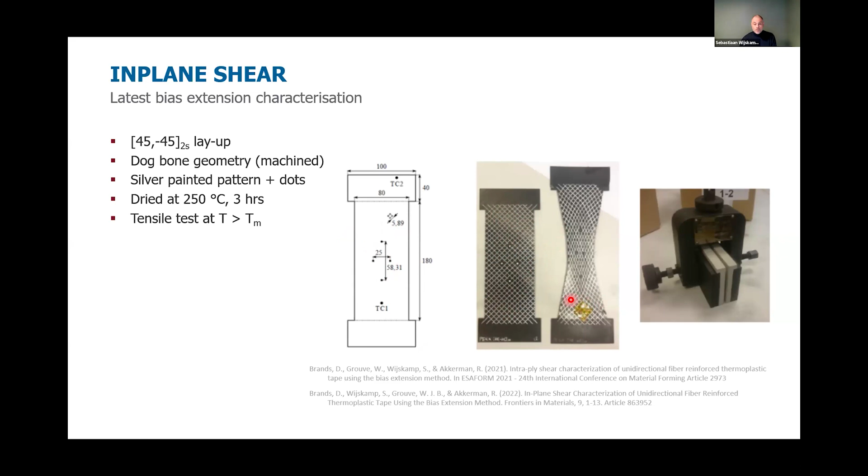The crosshatch pattern is to analyze the complete deformation field. And we perform these tests in a universal tensile testing machine at temperatures above the melting temperature, or after cooling down from the melting temperature to a temperature above the crystallization temperature.

As said, the shear angle can be measured by the video extensometer. Post-mortem analysis could be done using this crosshatch and the video picture image analysis. And zooming in, in some cases you could see also the onset of localization, but only at very, very high deformations.

Just to recap, doing a lot of experiments, we could say that the measurement of 2 strains with the video extensometer works really well. We are in a rather uniform strain state in the middle of the specimen. It's the same methodology as a woven fabric, and we can use this for large deformation and very high rates.

These are the typical curves that you see. Up to a certain displacement or shear angle, they coincide with a pin jointed net. That would be the most easy description of the bias extension test.

So we continue using this bias extension test and are currently also benchmarking it against the torsion bar. Most importantly, a researcher is now creating the models, finalizing the models with which a material card in the end for AniForm simulations can be measured.

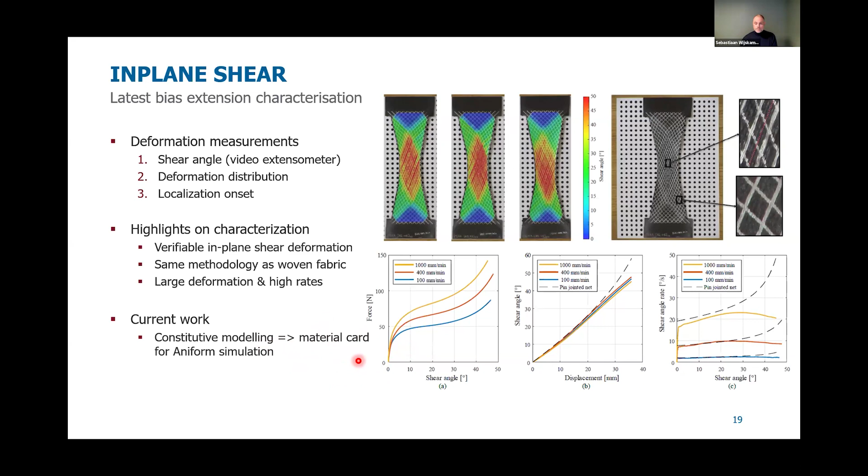And if you then simulate all these measurements, you can really validate your simulations. You can also start calibrating your wrinkling indicators here. For that, you need a good idea of the deformations that occur.

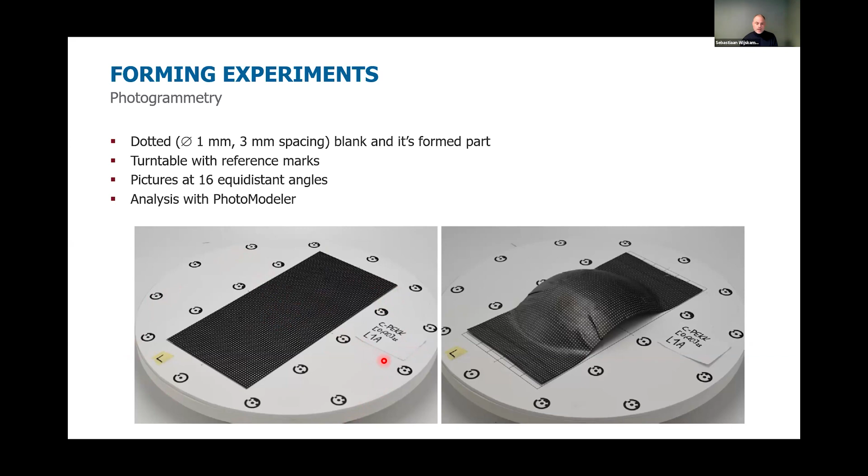So again, Dennis spent a lot of time devising a way to put a lot of small dots, 1 millimeter with a 3 millimeter grid, on a laminate, and perform an analysis with PhotoModeler, so photogrammetry, before and after the stamp forming. This is a turntable with reference marks. You have a camera on a fixed point, you rotate this table, and you get 16 pictures, and from that you can get the coordinates of the dots in 3-dimensional space.

Now, we've done this for quite a lot of layups here. Different widths, 2 materials, so that means 48 parts to be analyzed, looking at wrinkling and in-plane deformations. Again, here materials chosen were Toray TC1225 and Solvay, or Cytec, APC.

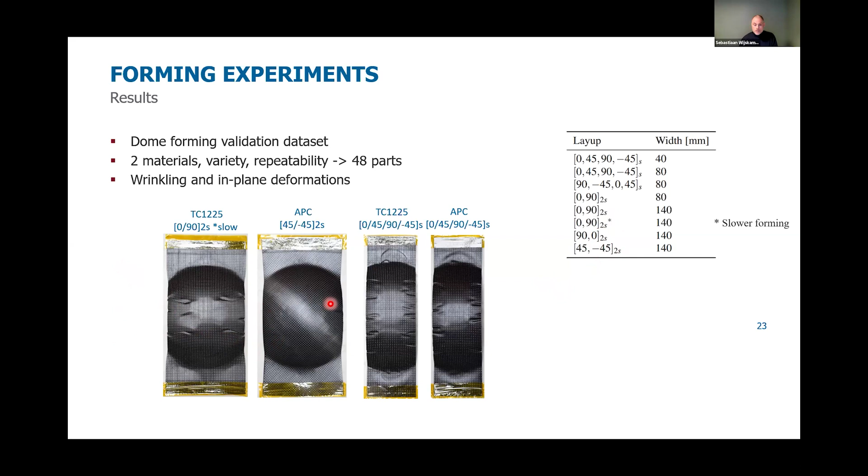In terms of achievements, we are now able to very accurately measure our deformations. All the data of this set has been published, as data in brief, I believe. It's available, so you can have a look at all the pictures and analysis. And currently, we're comparing these experiments with AniForm simulations.

Now, just to go back here, you see the analyzed deformation on the part. We take an average here. You see the white spots, those are dots that are missing because they are folded and not visible anymore. So this is what a typical deformation analysis looks like.

And all of these experiments are being virtually repeated, so simulated with AniForm and incorporating a new description for the bias extension, for friction. You can tune other parameters as well, such as bending, adhesion, typical things that are available in AniForm. Just a small glimpse.

Here we are comparing simulation to the experiment, and we see very good correlation there. We can use the AniForm plugin, a little environment where we can incorporate our own developed material models and test them before, if the interest is there from AniForm, they will implement it in a robust and industrial way.

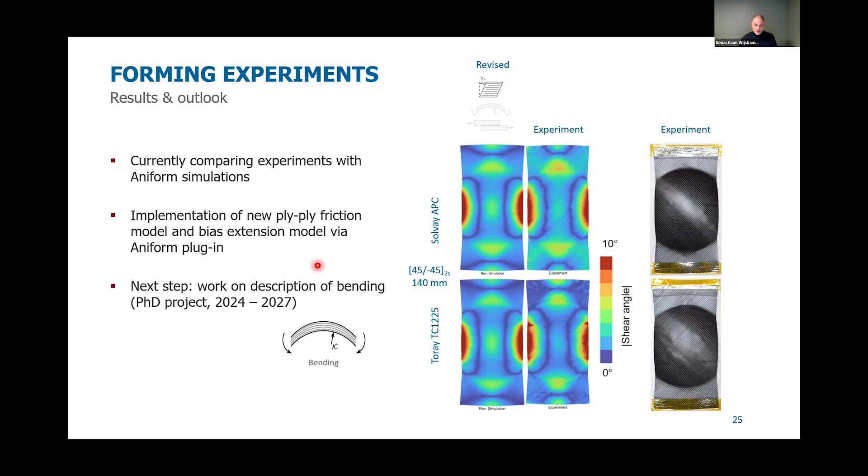With that, I would like to conclude both of our presentations with saying that the forming of thermoplastic composites is state of the art. Parts with moderate complexity already fly and are in cars today. Just doing process implementation will cost you money, it will cost you a lot of tools. So we really believe that process simulation tools will increase the speed of market implementation.

With a growing and continuous demand for better prediction accuracy and higher fidelity, we need more advanced material modeling, so we continue working on that. Our material characterization methods and our validation tools are evolving, and we think successfully for forming.

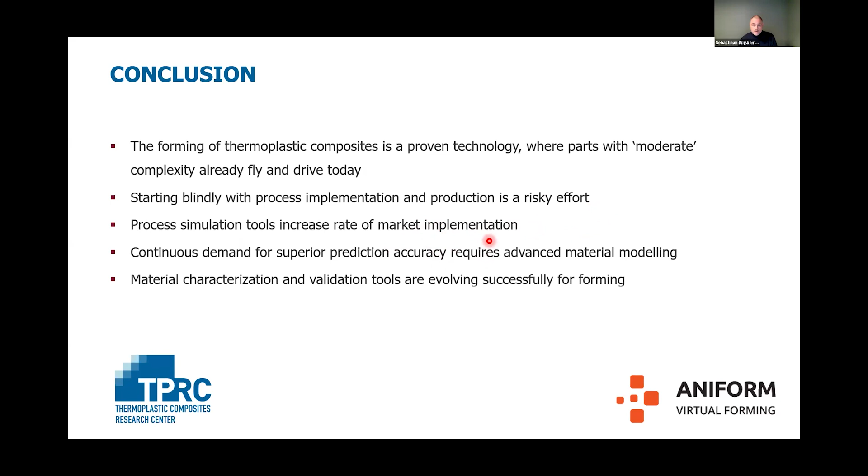With that, I would like to acknowledge the two researchers that performed all the work. Dennis and Rens are defending their thesis this year. They've already published a lot in different magazines, both popular and scientific, and their thesis will come out. Keep an eye on them. My thanks to them.